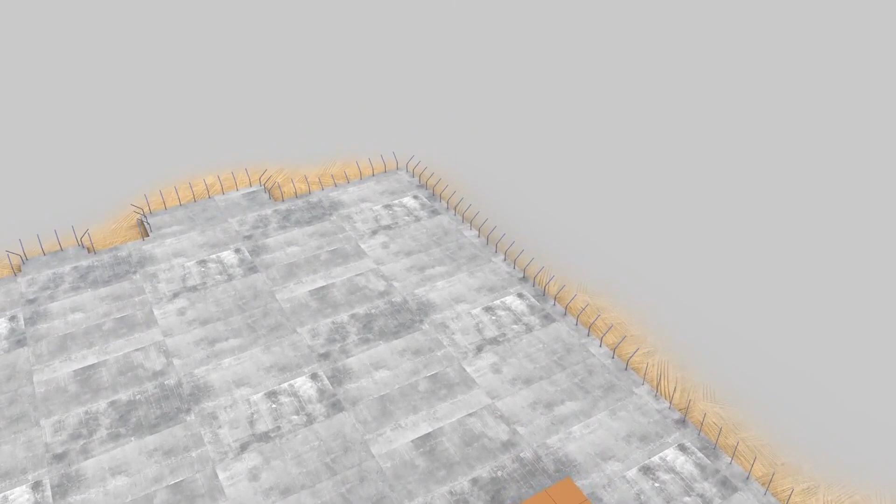This video is going to demonstrate the concrete encapsulation process. It's a hybrid concrete home. What we mean by that is that the home is traditionally built or framed with wood, and we provide a concrete cladding or encapsulation over the entire exterior. This makes it easier to modify existing homes, or if builders aren't comfortable building straight with concrete, they can do their framing and bring in a subcontractor.

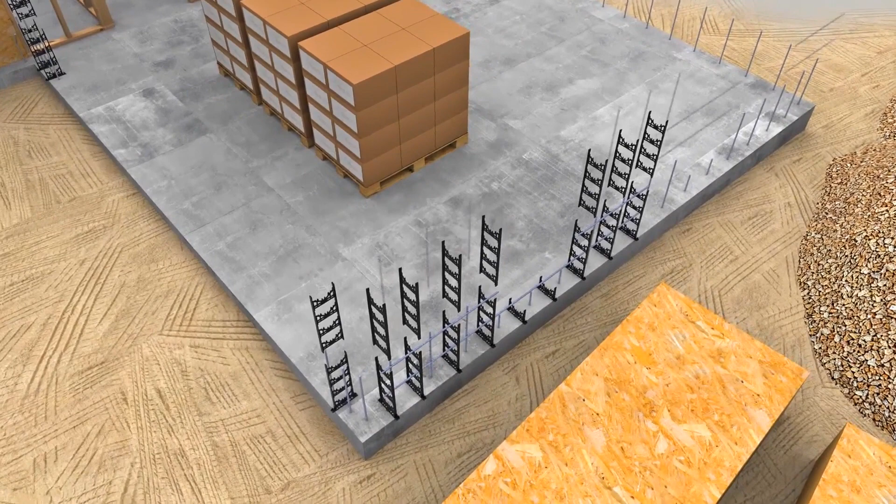The very beginning part of here is our traditional method of building a solid concrete wall. This would be more like the system that we have for the 523 system, which you'll see in other videos. But this demonstrates how these forms come together so that you can pour a concrete wall. We demonstrated this process with a garage. Typically, garages are the places where fires may start for an interior fire cause, so we like to recommend that you build the garages out of concrete.

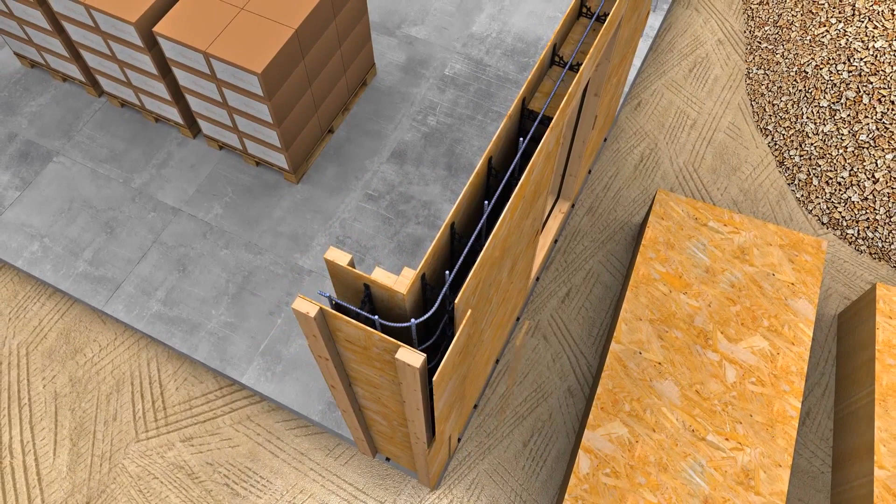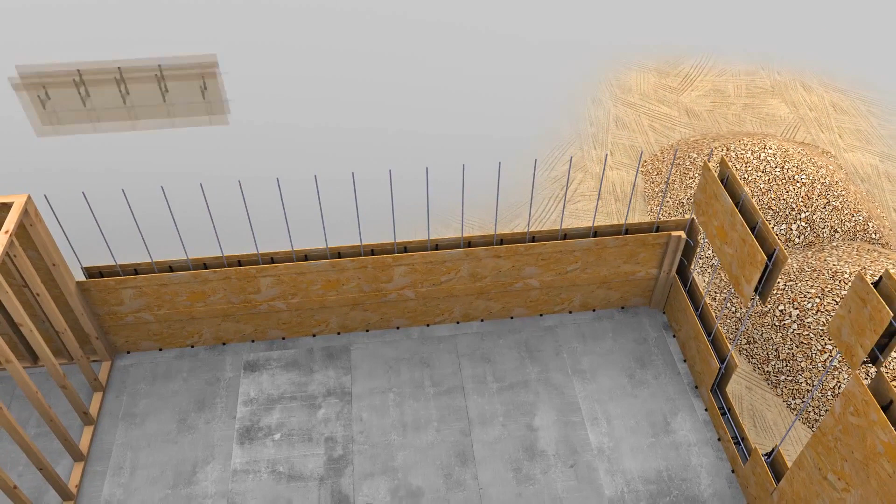There's a couple different ways that you can form up these walls to make this happen. The first part that you just saw there was forming in place. This part right here shows us building the boxes ahead of time and then stacking them up like Legos, if you will. We have found that this secondary process is actually a little more comfortable and easier to do, easier to install electrical or plumbing or anything in the wall that's necessary for that particular part of the house.

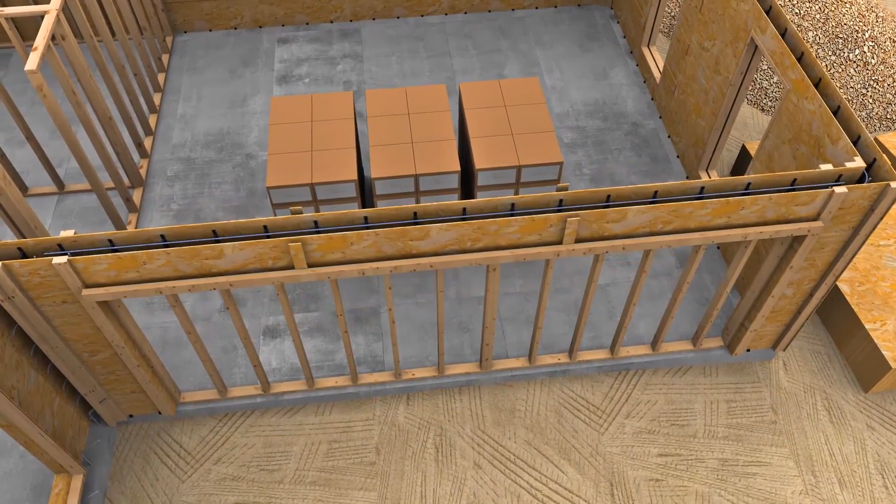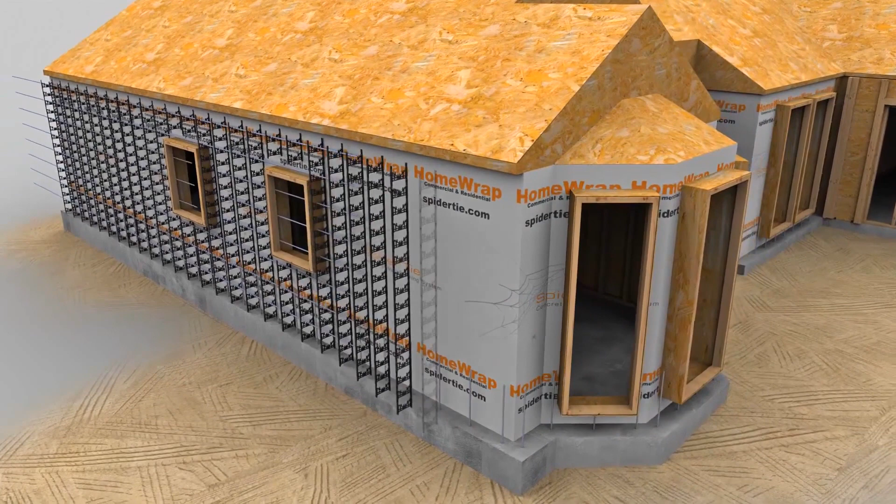Now, as you see here, we set the trusses on the wood frame just like you ordinarily would. Now the trusses are modified so that they can receive the concrete on the wall, and then the concrete can easily go up and over the eave and over onto the roof, which you'll see. After the entire building is completely framed, we wrap it with a building wrap, put the spider ties and rebar in, again any plumbing or electrical, and then clad the exterior with another layer of plywood.

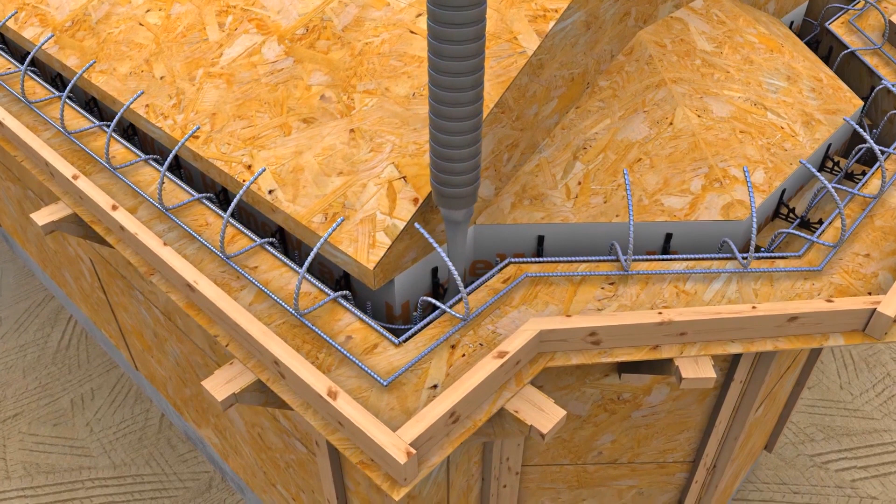Those triangular boxes provide the proper support for the eave, pour the concrete wall and the eave at the same time. Concrete will just flow in and around like in any other concrete forming application. But the beautiful part about this is that the concrete eave is poured monolithically with the wall. In doing so, this is where the strongest forces of nature find the weak spot in a home. So we recommend that the eave be poured with the wall.

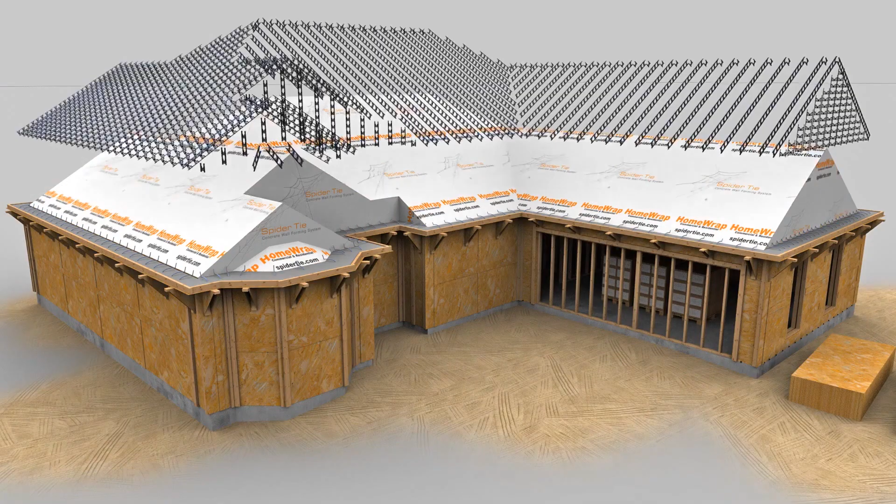Once the eaves and the walls are completed, we approach the roof the same way we do with the walls. We wrap the roof with a building wrap to protect the plywood underneath. We install the spider ties at 2 foot on center, place the rebar as per the specifications, then we install the final layer of 1/2-inch plywood on top of the spider ties.

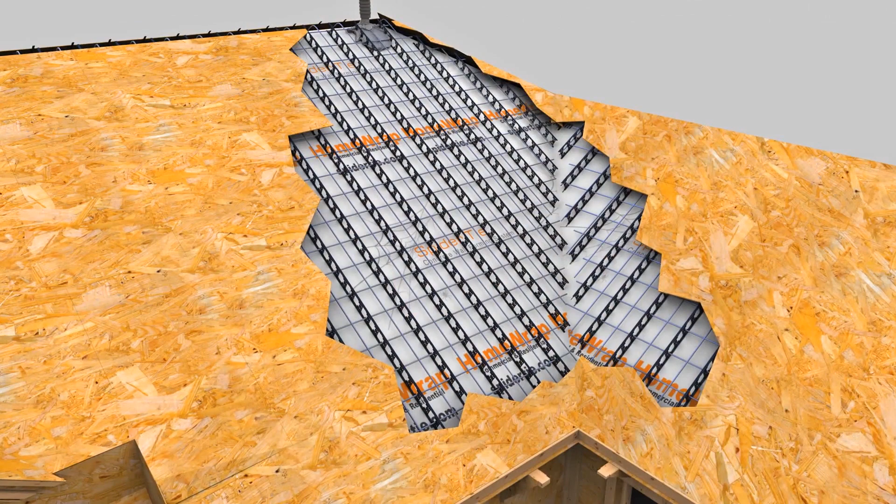This part of the animation is simply for demonstration purposes, showing how the concrete flows into the cavity that you've created. You're going to fill up the forms evenly on both sides, coming up approximately 4 feet on the right, then go over to the left side and fill up 4 feet and bounce back and forth. Doing this alleviates any unnecessary stress on the trusses.

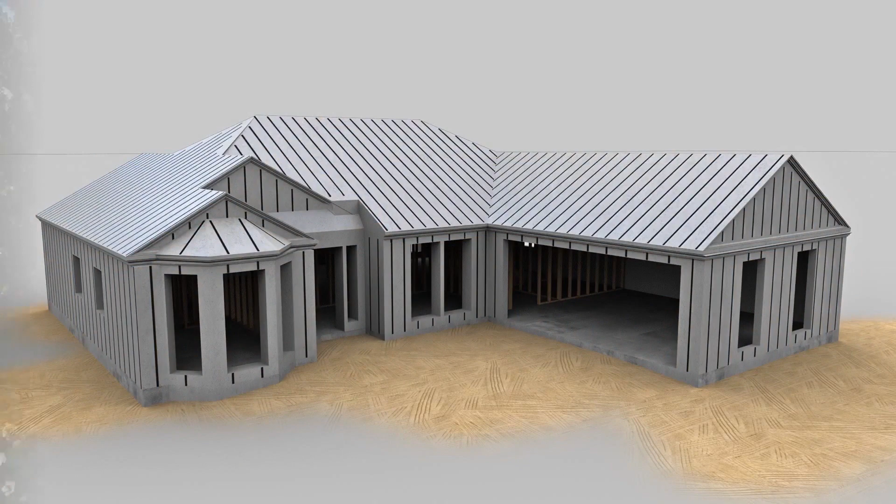Once the concrete has cured enough, you can remove all your plywood and you end up with a concrete encapsulation around your wood house. Once the finishes are applied, no one would be the wiser that you live in a concrete home. It looks like any other home in the neighborhood. But what you have is a house that can stand up to whatever nature wants to throw its way, whether it be tornadoes, hurricanes, or even wildfires.